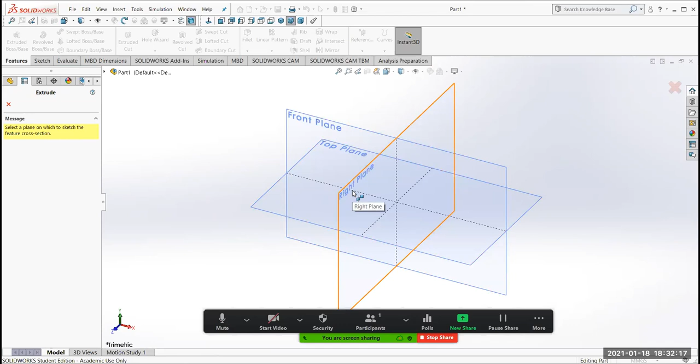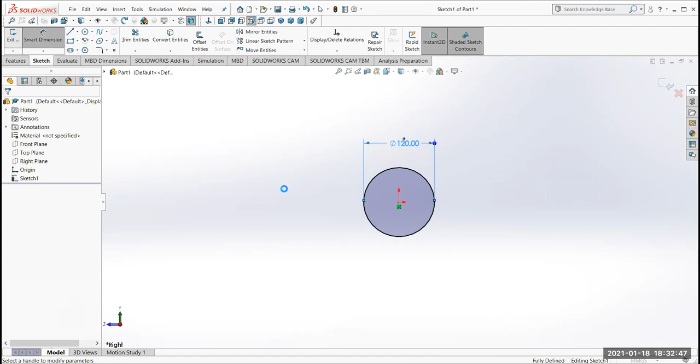Okay, so for the first one, we're going to use extrude boss base. I'm going to do it from the right side, and I'm going to start by drawing a circle. And this has a diameter of 120. So I dimension it. A dimension of 120. And exit the sketch. And the length of this thing is 840.

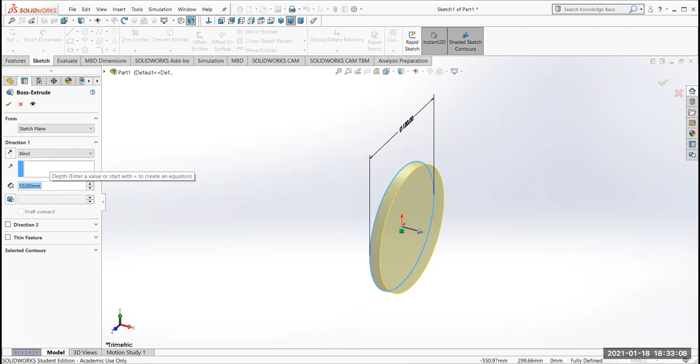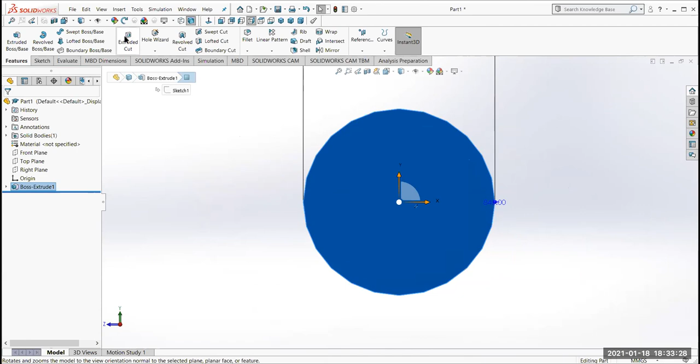And my copy is so small, I better pull out my phone and see if I can actually zoom in. Yes, 840 is the length. And there's the length of the axle. So now I'm going to go to the end of this thing, and I am going to cut in the bigger of the two. So I'm going to do an extrude cut. There are 2 different diameters that I'm going to cut. I'm going to do the bigger of the 2 first.

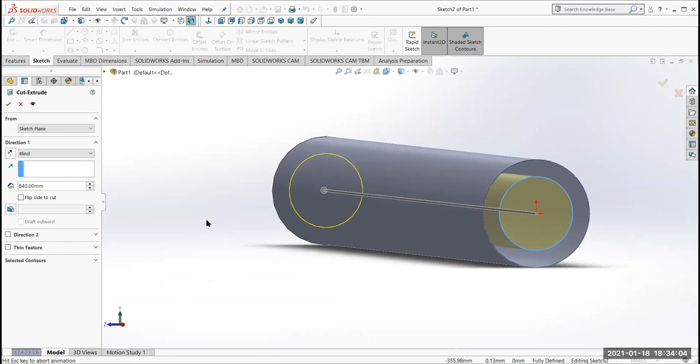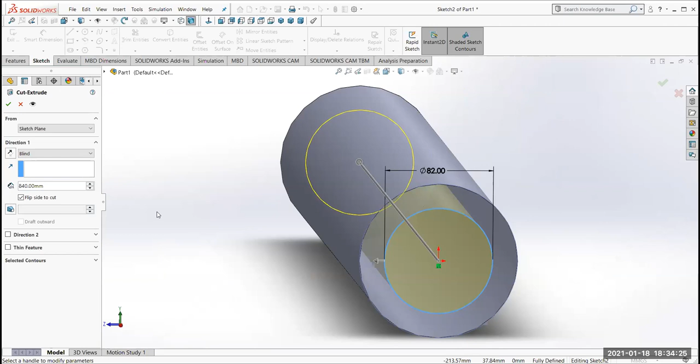So this is going to have a diameter of 82. Smart dimension this one, 82. Exit. And it's going to cut. Let's see, hold on, what did I say the depth was? The depth is 110 plus 90, so that's 200.

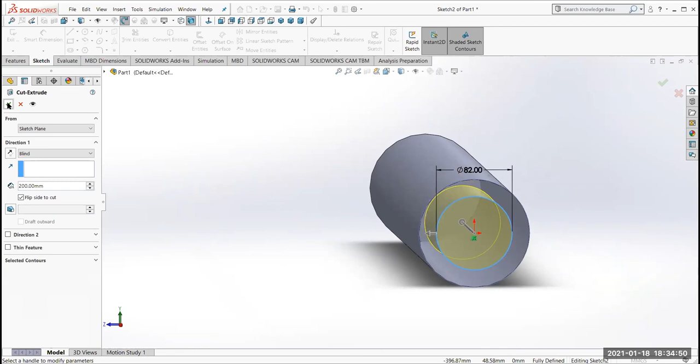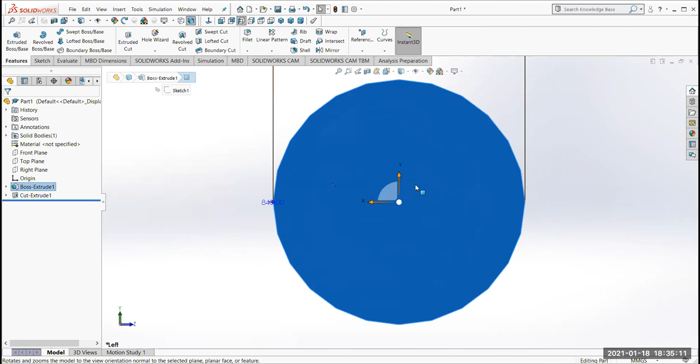I don't want the hole, I want this. Hopefully it gives this to me. What? There we go. Had me concerned there for a second. Looked like a shell. I'm going to do the same thing over on this side. I'm going to go normal to, we'll do a cut with a circle starting here. It's got a diameter of 82.

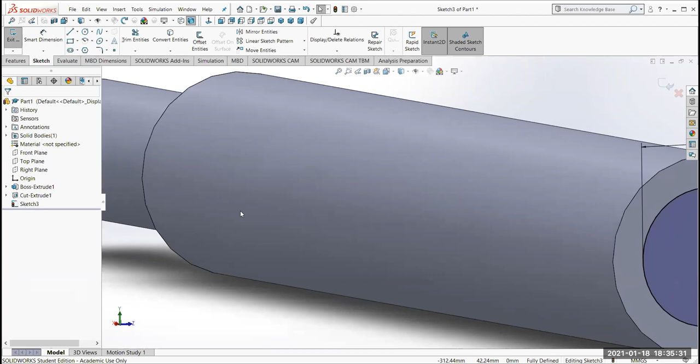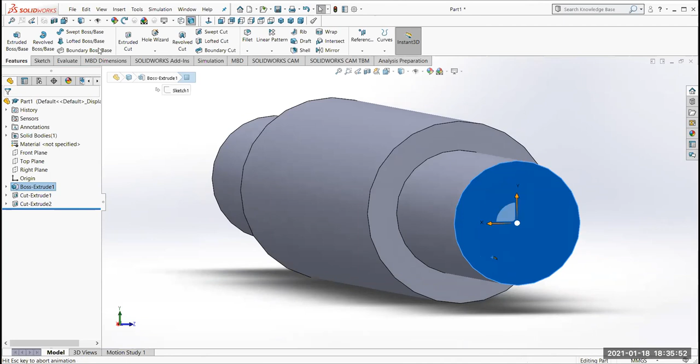And exit. Going back in, flip side to cut. Yep, going back in 200. Good. And then I'm going to cut on this face again. Circle. This one has a diameter of 78, I think. Again, I got to take out my phone and use the camera to zoom in; even with my glasses, I can't see some of this. 78, good. Okay, so let's smart dimension 78.

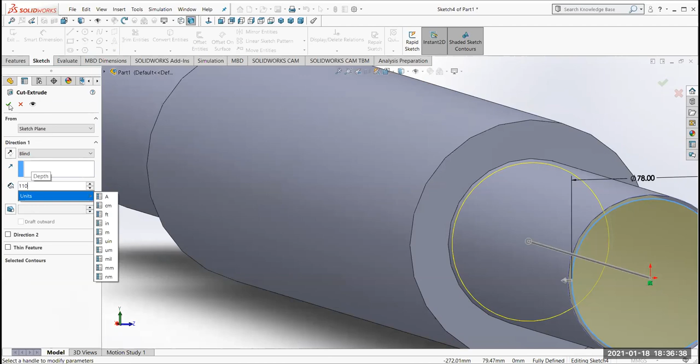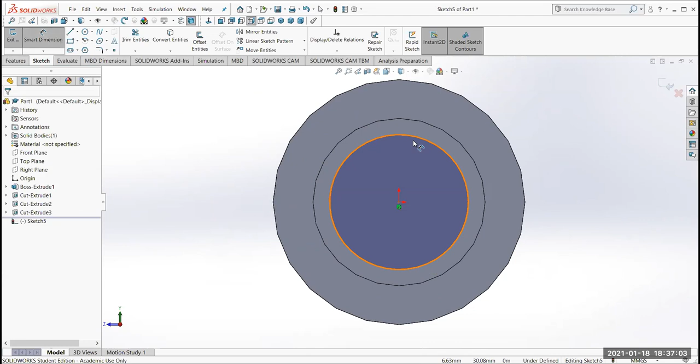And this one's going back 110. And again, flip direction. And set this 110. Swap this around. One more time. Extrude cut with a circle, smart dimension 78. Done. Exit the sketch.

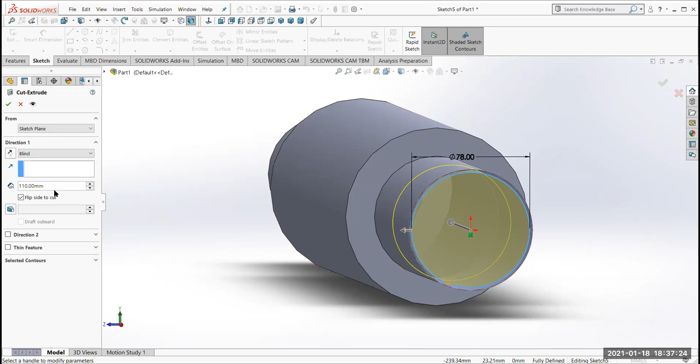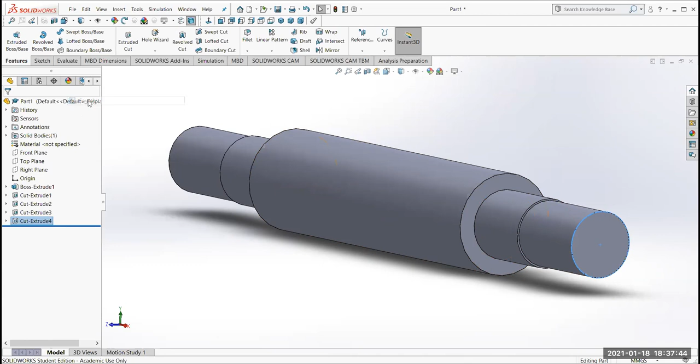I want to flip to the outside. Notice right now it's going to cut a hole in the middle. So that's why I click on this flip. Notice it gives me this outside arrow. And it's going to be 110. Okay. So there is the axle for our cannon. Let's save that, and we'll move on to the next video. Save as. And we can call it part 1 for the cannon, or axle, or whatever you'd like to call it.